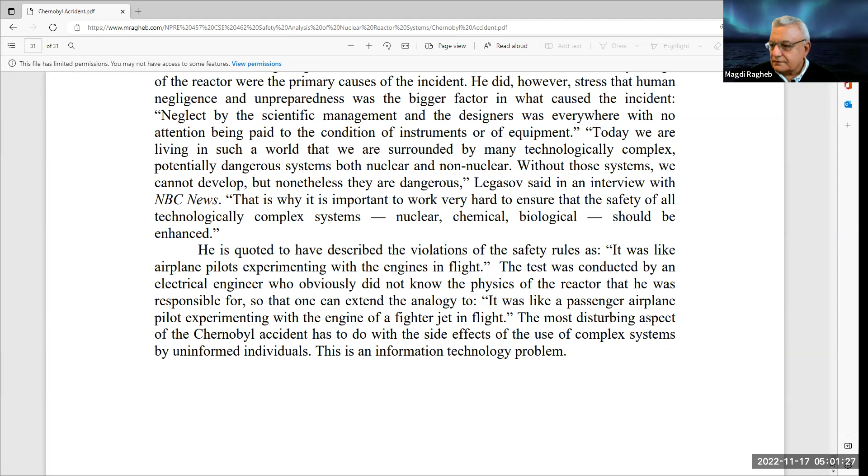In terms of the classification of the different major accidents that happened in the nuclear field in general, there is a classification that has been set up for the different levels of accidents in the history of nuclear energy generation. I included it as part of the chapter on the Chernobyl accident. Let's find it here, I think that's where we stopped.

There is an International Nuclear and Radiological Event Scale, designated as INES. It classifies the Chernobyl accident as an event at level 7. Later on, we'll study the Fukushima Daiichi accident, which is also considered a class 7 accident.

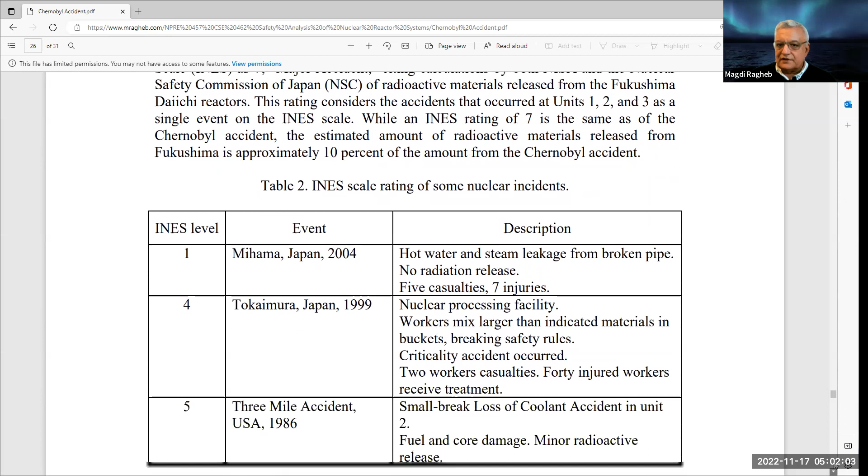But there have been other accidents before in the nuclear field that we should be aware of. In Mihama, Japan in 2004, hot water and steam was released from a steam pipe. No radiation was released, but the release of steam from a hot pipe caused casualties: 5 people died and there were 7 injuries. That is the lowest level of accident according to the INES classification.

In Tokaimura, Japan, a facility that reprocesses nuclear fuel, they take the nuclear fuel, dissolve it in nitric acid, and recycle it. They extract the plutonium and uranium, and then try to use the mixed oxide, an oxide of uranium and plutonium. So this is a nuclear processing facility.

The story goes that the workers in the plant were in a hurry to leave for the weekend, and they needed to mix materials, so they used buckets. Imagine radioactive material moved around in buckets, and they put in more buckets than indicated of liquid from the reprocessing plant that contained radioactive fuel, just being in a hurry. They broke the safety rules.

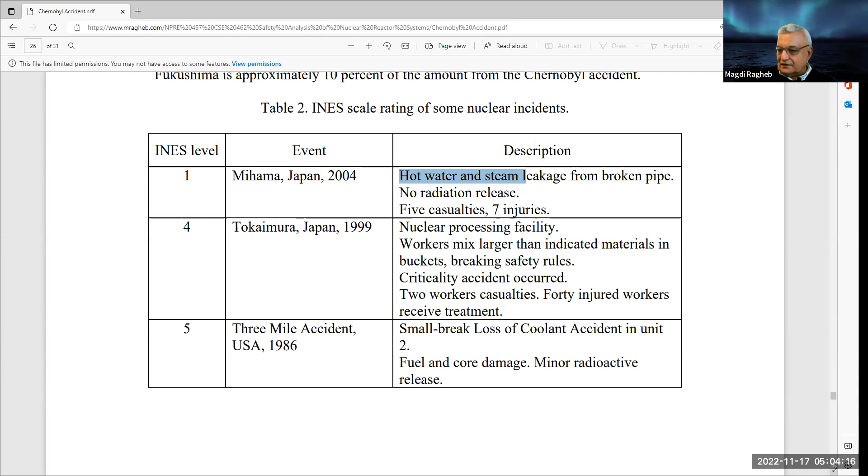Later on, we'll study 3 Mile Island in the United States. It's classified as a small break loss of coolant accident in unit number 2. There were 2 units operating at the 3 Mile Island location, and number 2 was the one that had the accident. We'll study in more detail the human errors as well as the equipment failures and design flaws, which are the main causes of these accidents.

In that case, the core of the reactor did melt and was damaged. There was a minor radioactivity release. Nobody died in the accident, fortunately. Unit 1 continued operation for a long time, but just because of aging it became too old and they discontinued its operation. 3 Mile Island was a category 5 according to the INES scale we defined earlier.

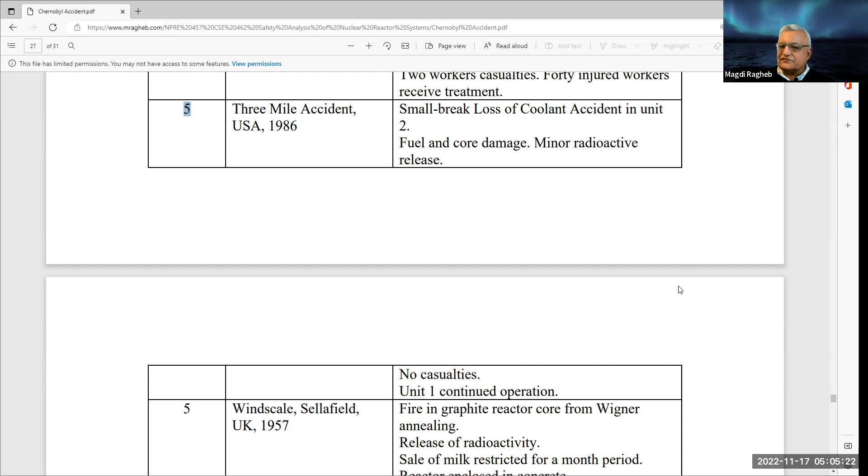Windscale in Sellafield is a new name for Windscale in 1957 in the UK. Remember, it was a dual purpose plant producing both plutonium and electricity in the UK. We got a fire in the graphite core from the process of releasing the hardness from the Wigner energy, the process of annealing. They did not conduct it carefully, and the graphite caught fire, releasing radioactivity from the fuel to the environment.

The main concern was iodine being released at the high temperature of the accident, the graphite burning. The iodine ended up depositing itself on grazing materials where cows are grazing in the fields. It finds its way to the milk, and the milk will find its way to people using cheese or drinking the milk.

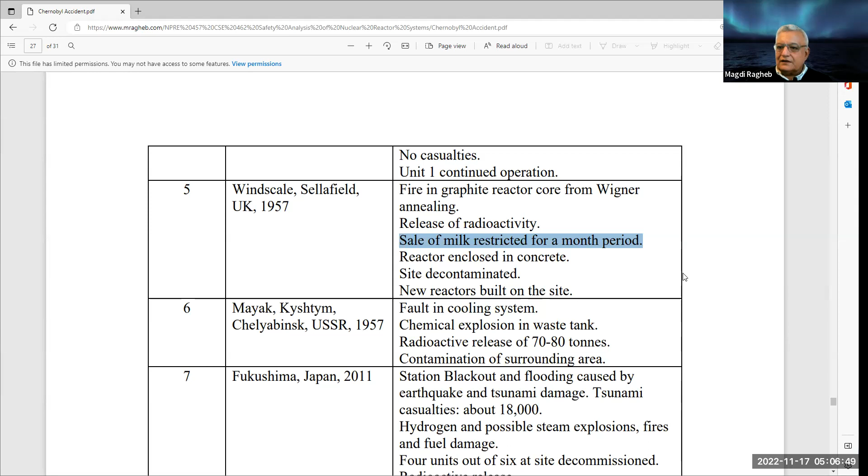So in that case, grazing was banned. They kept the cows indoors and only fed them on stored hay, alfalfa, or whatever material they were feeding them. Nobody was hurt in a significant way. The reactor ended up being enclosed in concrete, interesting enough, the same situation as happened at Chernobyl.

Chernobyl, interestingly, also had a core with graphite as a moderator. In both that case and Windscale, the graphite was almost like charcoal and caught fire. The site at Sellafield, or Windscale, was decontaminated, and new reactors were actually built on the site.

If you travel to Europe, you'll notice it's very crowded compared to the United States. Here, I would find a new site, but in the UK they reuse the same site. Windscale is classified as a category 5 accident in terms of severity on the INES scale.

There was an accident even more serious than Windscale that happened in the old USSR, the Union of Soviet Socialist Republics, in 1957. It happened at a place called Chelyabinsk, caused by a fault in the cooling system.

That was a reprocessing plant, the same as Tokai Mura in Japan. They disposed of waste into waste tanks. Some say it was in a pond outside the plant, but the Russians say it was a waste tank. A chemical explosion happened in the tank — not a nuclear explosion, simply the chemicals exploded. There was a release of 70 to 80 tons of material from the tank, which would have been in liquid phase. They decontaminated the surrounding area, and the plant basically continued operating.

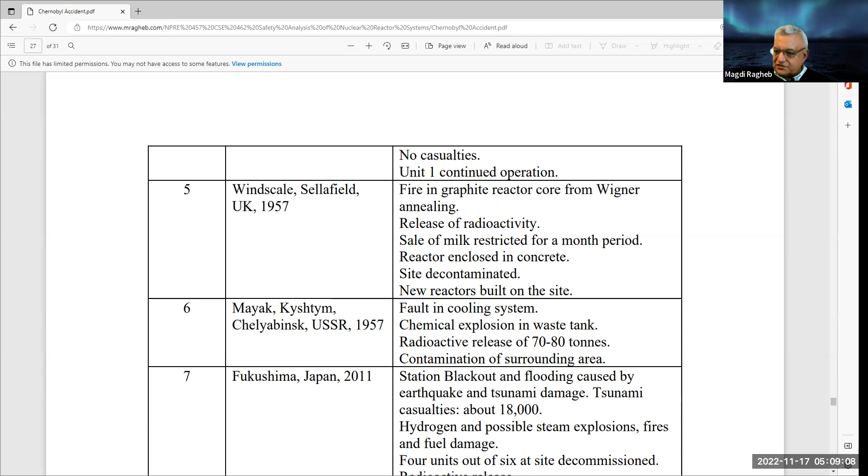Notice when we write tons here, this is the French way of writing ton, the SI or Système International unit. Remember, 1 metric ton is 1,000 kilograms. If you write only TON, it is identified as the American ton, 2,000 pounds. There is also a short ton and a long ton.

Last time we dealt with Chernobyl, which happened in 1986. The core became critical, and a fire in the graphite core ensued. There was a steam explosion that threw the lid, 800 tons in weight, up in the air and back down — that's what we analyzed in the chapter on the phenomenology of a steam explosion.

The fire at Chernobyl burned for 9 days, and basically heroic efforts were made by firefighters, knowing they were being exposed to radiation, trying to extinguish the fire.

There was also a steam explosion, caused by a design flaw in that they placed water in their pressure suppression pool right below the reactor core. I suspect a similar situation, to a lesser degree, happened in unit number 3 at Fukushima, but it's not being advertised — it needs to be studied over time.

Basically, 47 first responders, as they are called, lost their lives, unfortunately, and there were 2 casualties in the steam explosion. There has been a significant radioactive release in the area around Pripyat, the little town close to Chernobyl.

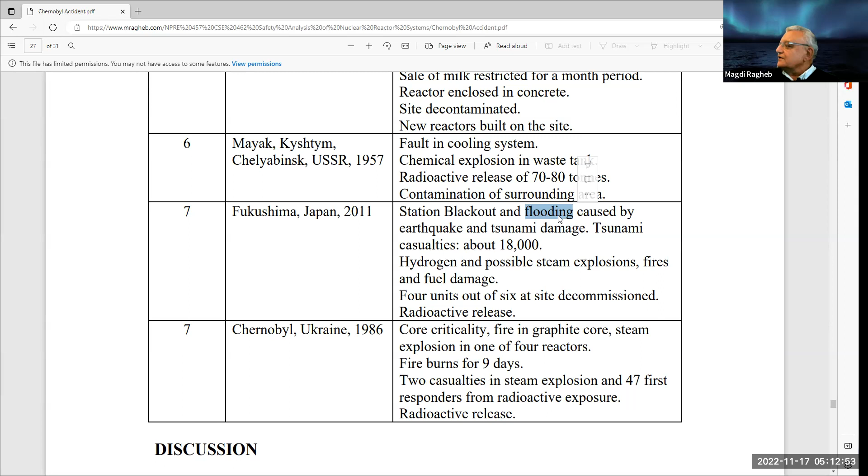So it adds to the list of causes of accidents in that case, not just human errors, equipment failures, and design flaws, but also natural disasters as possible causes. The casualty list has not been workers at the plant itself.

However, unfortunately, 18,000 people lost their lives in Japan from the tsunami itself. There have definitely been hydrogen explosions, and we know hydrogen is produced from the interaction of very high temperature steam with metals, and hydrogen, if not released from the containment structure, is highly reactive.

It led, in the case of the Fukushima accident, to hydrogen explosions. Four units out of six on the site have been decommissioned, even though two of the units were not operating at the time the accident happened. There has definitely been a radioactive release.

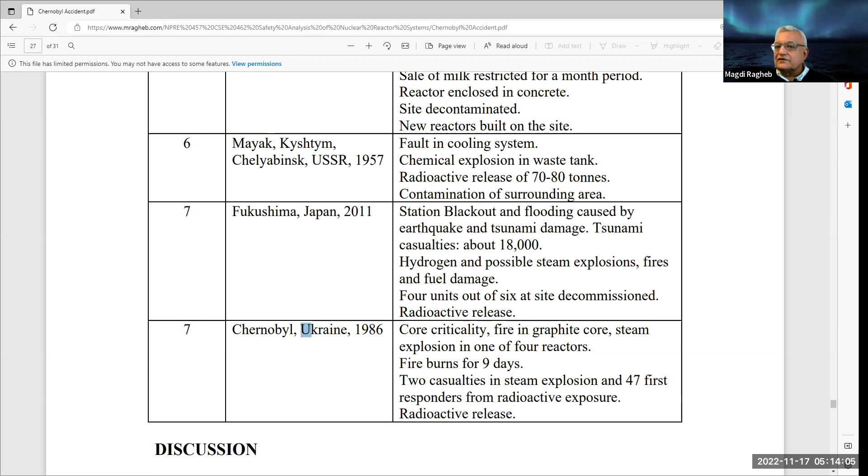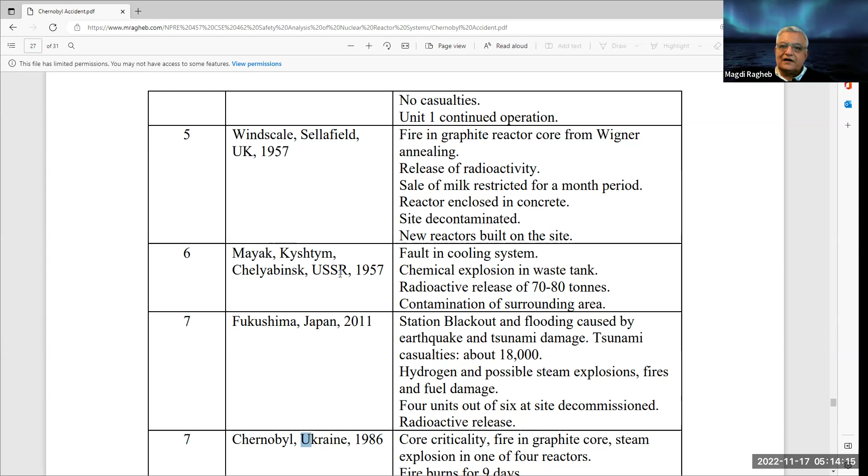So the most serious accidents are Chernobyl, which we covered last time, as well as Fukushima at the same level of seriousness, followed by the reprocessing plant at Kyshtym in the old USSR, now Chelyabinsk, in Russia. Then Windscale and

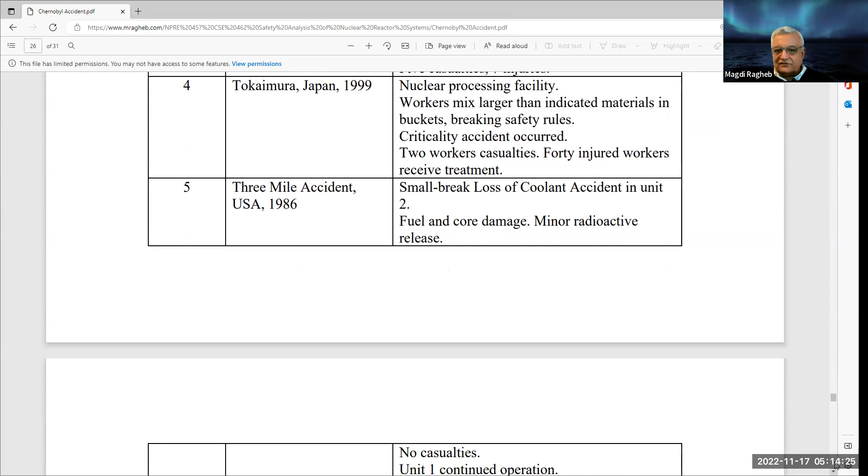the one at Tokai Mura and Three Mile Island. The interesting thing is that Three Mile Island didn't cause any casualties whatsoever, even though unit 2 in the plant had a core that totally melted. It was totally destroyed in general.

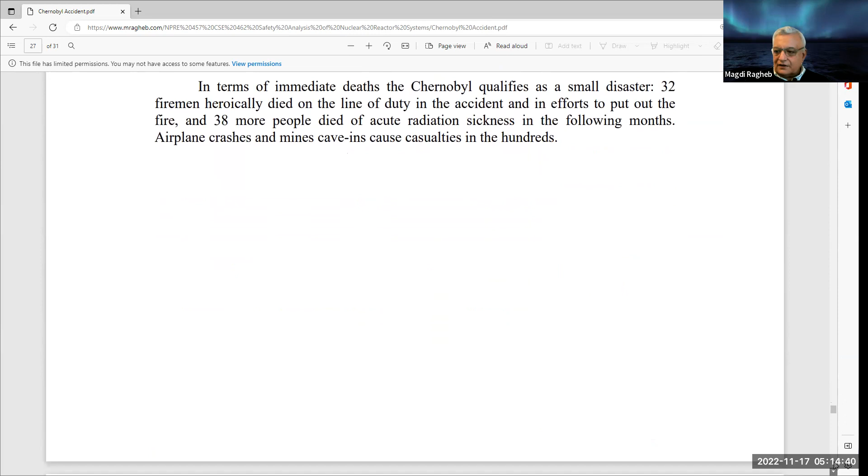This is the situation right now at the Chernobyl plant. They constructed, remember, the plant at the site of Chernobyl, north of Kiev, in the north of present-day Ukraine, and there were four units there.

The three other units continued operation to provide the country and Europe with electricity. There has been talk about shutting them down and replacing them with light water reactors.

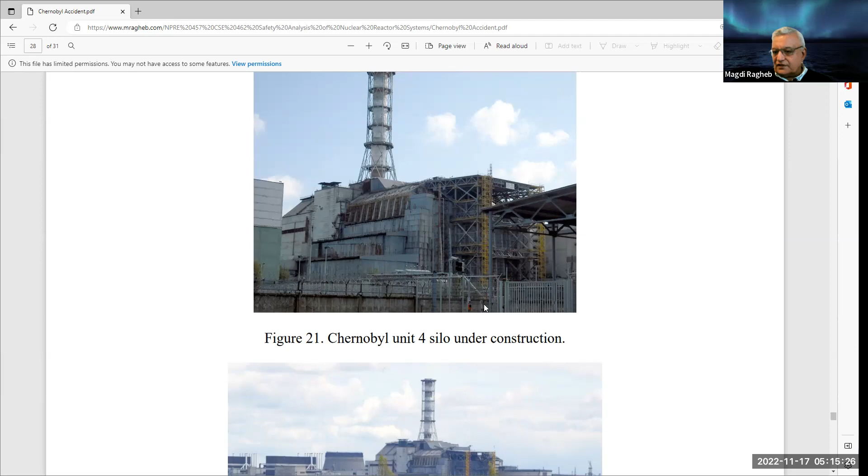They probably have been shut by now, but you could see they started building a large silo above the damaged plant. This is a chimney that aerates the plant itself. You could see here the other units, reactors 1, 2, 3, continued operation for some time.

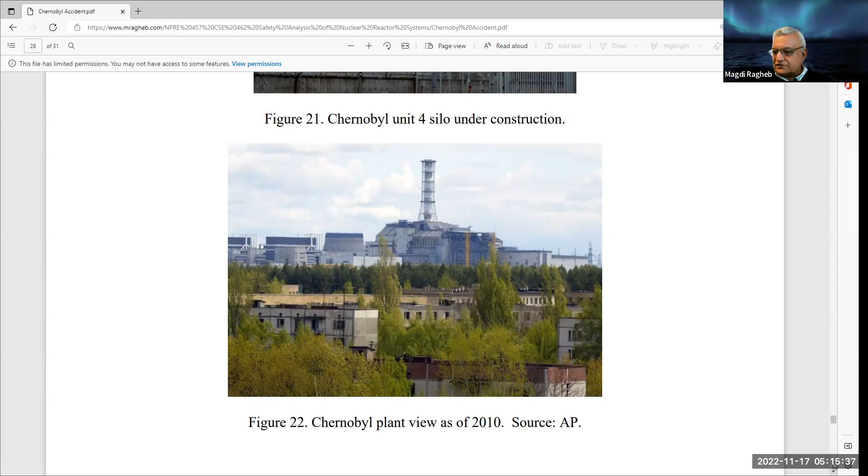And lately, the concrete silo has also been covered with a large steel containment. The idea is to allow radioactivity to decrease over time before they can go in and remove it and dispose of it underground. In addition, covering it prevents the elements, water and wind, from releasing the radioactivity to the environment.

As I suggested, this is the way it looks now. The fascinating thing is that the release of radioactivity has been primarily cesium-137 in the surrounding forests. And we said earlier, when we studied the different isotope features, that this has a 20 or 30 year half-life. So the radioactivity has been decreasing very substantially.

And they have, in fact, been allowing older people to return to their homes. Wildlife and nature are basically restoring the woods around it. They now find wildlife like wolves and other wildlife in general, including even deer. So this is the situation there.

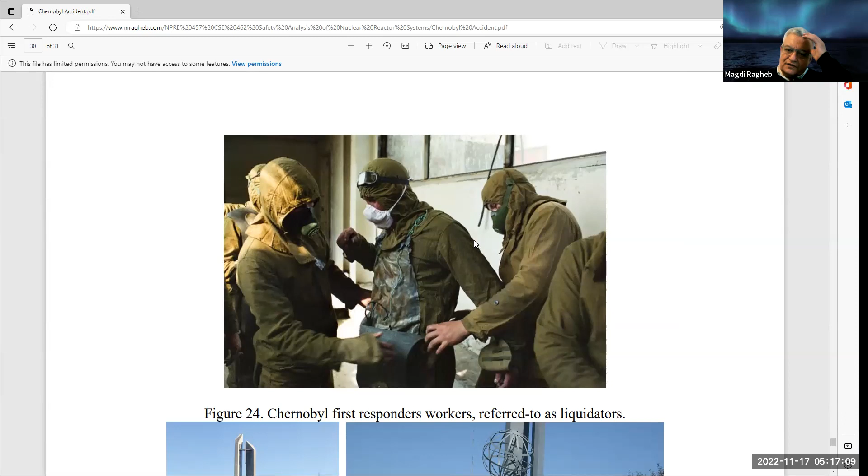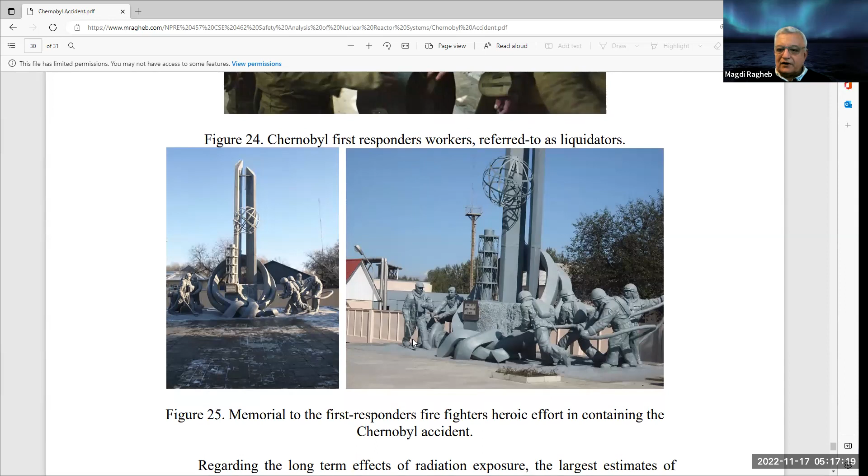The Ukrainians and Russians basically honor the people who have been called the liquidators. You could see here that they were definitely exposed to radioactivity in trying to control the accident. This is a memorial to those first responders, the firefighters who lost their lives fighting the fire in the plant itself.

From that perspective, you'll find that Chernobyl was the most serious accident in the history of nuclear power generation. A famous Russian scientist, Valery Alexeyevich Legasov, was a Soviet inorganic chemist and member of the Academy of Sciences, remembered as the chief of the commission investigating the Chernobyl accident.

In 1986, he headed to Vienna, Austria, for a conference by the International Atomic Energy Agency, located in Vienna, and they had a five-hour hearing. He stated that the main cause of the accident was definitely human error.

The operators did not really operate the plant as they should have. They should not have overridden the safety systems, as well as the faulty design of having a positive power coefficient of reactivity. It's a type of plant with a different moderator, the graphite, than the coolant, the light water, in that design.

He also stressed primarily the human negligence and unpreparedness, and that is a lesson you have to learn. Sometimes we become complacent in dealing with our own safety equipment.

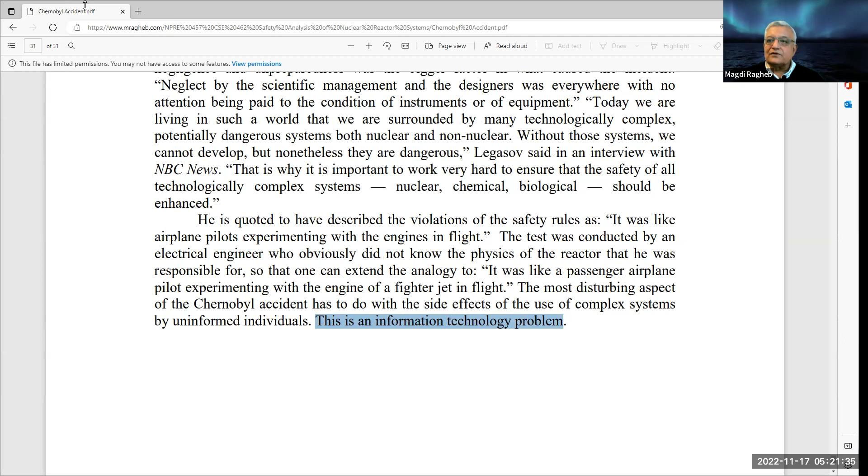The most disturbing aspect of the Chernobyl accident has to do with the side effects of the use of complex systems by uninformed individuals. This is, in fact, an information technology problem that we all have to be aware of. That is as much as I want to cover about the Chernobyl accident in a thorough way.

There was another accident that hasn't been publicized a lot, that tells you more about the design flaws that could happen in the design of a complex system. A nuclear power plant is a complex system in that case. This is exemplified by the Browns Ferry fire.

Browns Ferry is a plant here in the United States. It's a 3-unit plant, units 1, 2, and 3. This is an actual picture of the plant — 3-unit boiling water reactors. It is near Athens in Alabama, on the banks of the Tennessee River, where it gets its cooling. It was commissioned in 1966 and finished in 1974.

It became the Tennessee Valley Authority's plant. The Tennessee Valley Authority is a utility run by the government of the United States, so it's a public utility. The TVA runs coal power plants, hydroelectric power plants, and nuclear power plants to produce electricity for the Department of Energy complex in the area of Oak Ridge, Tennessee.

They also provide power to places like Alcoa at Knoxville, Tennessee, very close to the Oak Ridge laboratory site. Alcoa stands for Aluminum Company of America — it produces aluminum, and the production of aluminum needs quite a bit of electricity. In fact, our power lines in this area carry power from around us — north, south, east, west, as well as from Iowa — all the way south to Tennessee, where they also use that electricity in the production of aluminum in general.

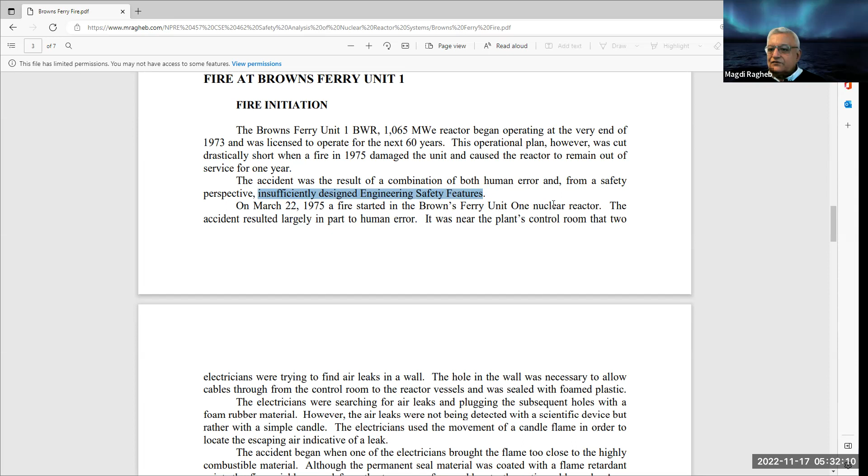On March 22nd, 1975, a fire started at unit number 1. Remember, we have 3 units there. The accident resulted largely from human error. It was near the plant's control room, and 2 electricians were trying to find air leaks in a wall. The hole in the wall was necessary to allow cables through from the control room to the reactor vessels, and the pipe was sealed with foamed plastic, styrofoam.

The electricians were searching for air leaks, and they were plugging the subsequent holes with a foam rubber material. However, the air leaks were not being detected with a scientific device, but rather with a simple candle. Imagine a very expensive power plant that has achievement awards in operation, and they go and use a candle to detect the air leaks. The electricians use the movement of a candle flame in order to locate the escaping air indicative of a leak. The accident began when one of the electricians brought the flame too close to the highly combustible material, which is the foam insulation.

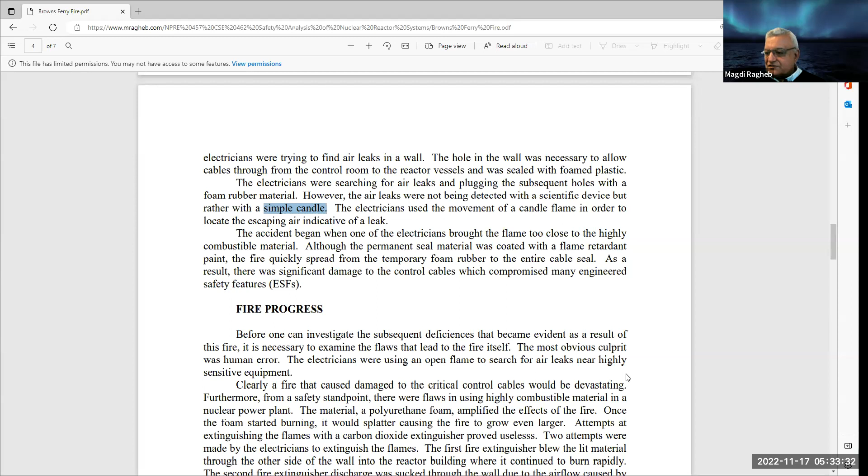Although the permanent seal material was coated with a flame retardant paint, the fire quickly spread from the temporary foam rubber to the entire cable seal. As a result, there was significant damage to the control cables, which compromised many engineered safety features. Now, that's very interesting, because now you lose control. You lose the contact between the control room and the safety equipment and the control rods and the whole operation of the reactor, and it's threatened to really become a very serious accident.

A fire that caused damage to the critical control cable would be devastating. From a safety standpoint, there were flaws in using combustible material in a nuclear power plant. You don't do that. The material, a polyurethane foam, amplified the effect of the fire. Once the foam started burning, it would splatter, causing the fire to grow even larger. So that is what happened if you set fire to styrofoam.

Attempts at extinguishing the flame with a carbon dioxide extinguisher proved useless. They brought carbon dioxide, and they started trying to cover and extinguish the fire. That's an electrical fire, they said, and you extinguish electrical fires with carbon dioxide. But then they brought in more air by blowing the carbon dioxide into the ducts, so the fire even grew larger.

2 attempts were made by the electricians to extinguish the flames. The first fire extinguisher discharge blew the lit material through the other side of the wall into the reactor building. So they made it even worse from the outside to the inside, and it started burning rapidly. The second fire extinguisher discharge was sucked through the wall due to the airflow caused by the fire, and only caused the flammable material to spread even more.

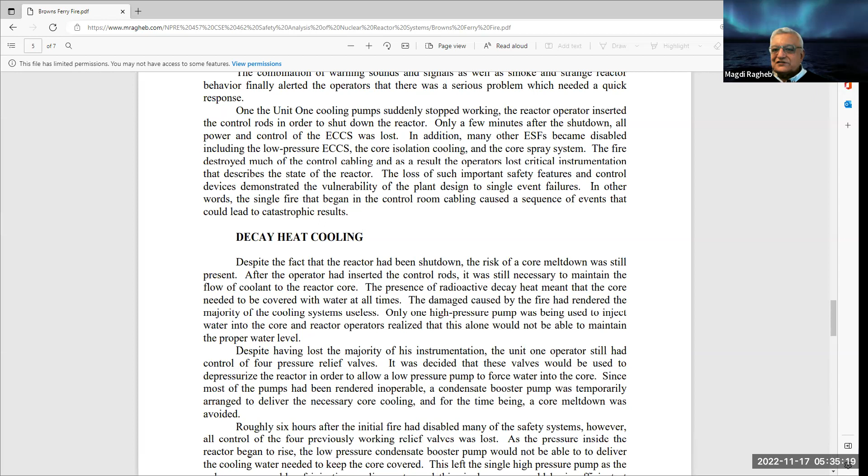So they are faced now very quickly with the same situation as the people at Windscale faced, a fire in the graphite—but that was not in that case in the graphite. It was a fire in the insulating material. And lo and behold, it's around the control systems. So they lost the connection between the control room and the reactor proper itself.

And the analogy is interesting with the Sellafield or Windscale accident, because initially they would not try to extinguish the fire with water. They tried the carbon dioxide and everything, and it didn't work. And then the fire chief at Windscale in the UK suggested that they have to cool the fire and use water. And when they used water, that is only when they were able to extinguish the fire. The same situation, interestingly enough, happened at the Browns Ferry plant.

The initiation of the fire was not the only event triggered by human error. After efforts made by the electricians to put out the fire with extinguishers had failed, one engineer attempted to activate an emergency system that would purge the room of oxygen by releasing a large amount of carbon dioxide.

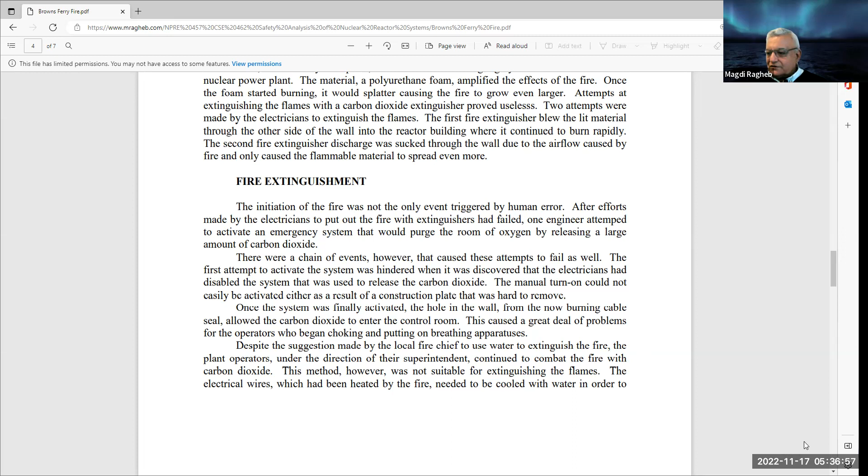There was a chain of events. The first attempt to activate the system was hindered when it was discovered that the electricians had disabled the system used to release the carbon dioxide. So they were not able to use the carbon dioxide. The manual turn-on could not easily be activated either, as a result of a construction plate that was hard to remove. So they could not really activate it initially.

Once the system was finally activated, the hole in the wall from the now-burning cable seal allowed the carbon dioxide to enter the control room. And that caused a great deal of problems for the operators, who began choking. Of course, we cannot breathe carbon dioxide. And that's why in control rooms you'll find that they have oxygen masks so that they can breathe in case there is some kind of carbon dioxide release.

In that case, the operators started choking and putting on breathing apparatuses to operate with the carbon dioxide around them. So they really sent the fire into the control room now with the carbon dioxide.

Came up the suggestion by the local fire chief, like at Windscale, or maybe he has read about Windscale: just let's use water to extinguish the fire. The plant operators, under the direction of their superintendent, when everything else failed, for a while continued to combat the fire with the carbon dioxide. It was not suitable for extinguishing the flames.

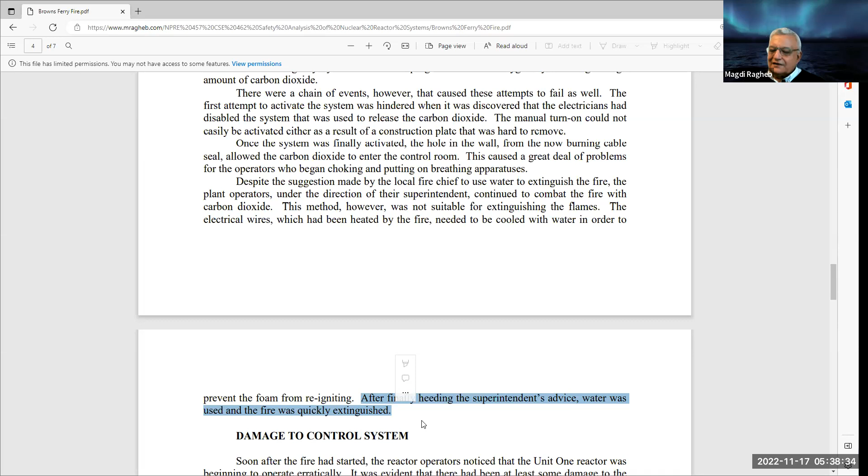The electrical wires had been heated by the fire and needed to be cooled with water in order to prevent the foam from reigniting. After finally deciding to heed the advice of basically the firefighters and using water—if they would have learned about Windscale, they would have used it all the way from the beginning—they used water and the fire was extinguished and the reactor was safely shut down.

The damage to the control system was significant, and it may have prevented the operation of the emergency core cooling system. Once smoke began to come out from the panel that controlled the engineered safety features, in the control room you find the panic system, all kinds of lights flashing at you telling you there is something wrong, and then you have also sounds of alarms, and it becomes a very alarming situation in general.

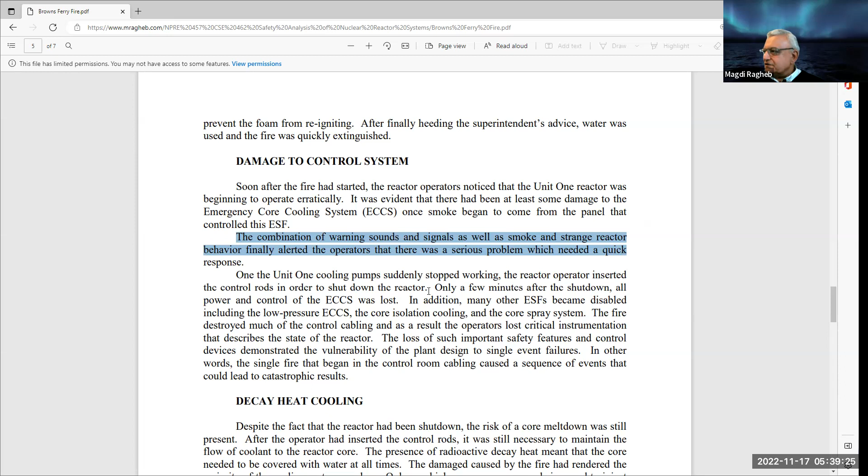On Unit 1, the cooling pump suddenly stopped working. The reactor operator inserted the control rods and shut down the fission reactor. So in that case, they were left only with the decay heat and not the 1,000 megawatt electrical power generated.

Many engineered safety features became disabled. If you don't have control on them with the wiring, you do not have control on the engineered safety features—the core isolation cooling, the core spray system that operates for boiling water reactors—also stopped operating. The loss of such important safety features and control devices demonstrated the vulnerability of the plant design to single event failures, as they're called—in that case, the fire.

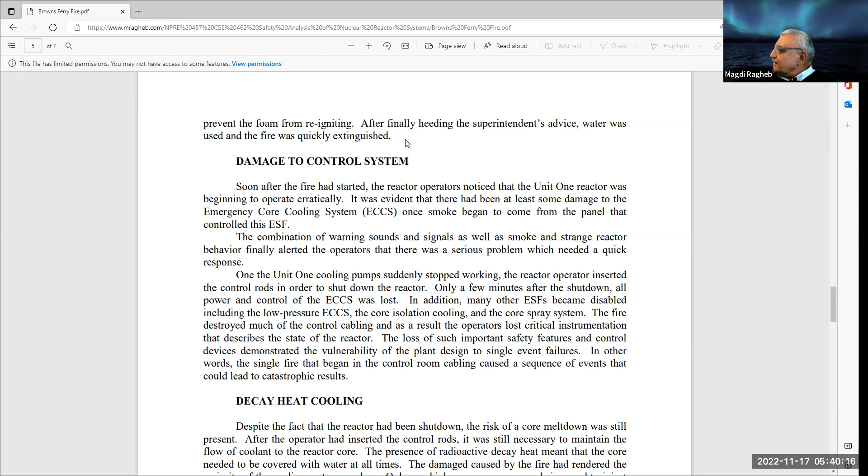Now, the fire happened—it's a single event—but because it affected many of the control systems, the wiring, it became what we called, when we studied fault tree analysis, a common mode failure. So one event of fire caused the failure of many of the other engineered safety features. In other words, a single fire that began in the control room cabling caused a sequence of events that could have led to very catastrophic results.

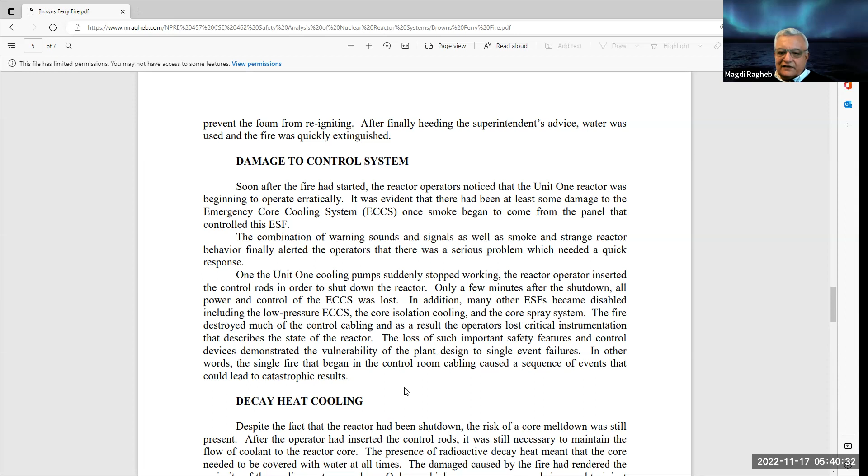We were lucky it didn't basically progress into a very serious accident. Decay heat—since they were able to insert the control rods, they shut down the main fission reaction, which they should have done immediately from the beginning.

They had to deal with the decay heat removal system, and that's why I've been advocating in many articles that the nuclear industry should switch from using solid fuels, in which you leave the fission products that generate the decay heat even after you shut down the fission reaction. The alternative is to use a liquid. So if you move from using solids as a fuel to a liquid, a molten salt as an example, you could basically remove those fission products because you are circulating the liquid continuously, and you eliminate totally the decay heat problem that has been the cause of many of the accidents in the history of nuclear power generation, be it Three Mile Island, the Browns Ferry fire that we are reading about today, the Chernobyl accident, as well as Fukushima in general.

It took 6 hours after the initial fire had disabled many of the safety systems. The pressure inside the reactor began to rise.

The low pressure condensate booster pump could not deliver cooling water to keep the core covered, so in that case you could melt the core. This left a single high pressure pump as the only source capable of injecting cooling water, and the single pump would be insufficient at keeping the core covered.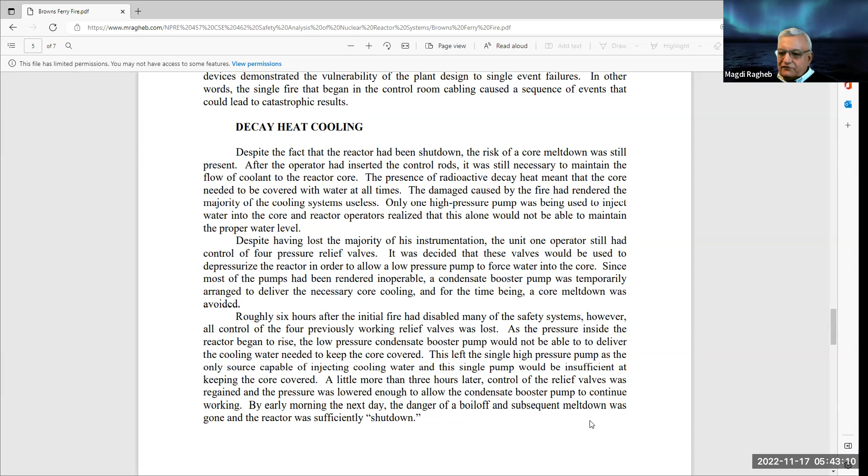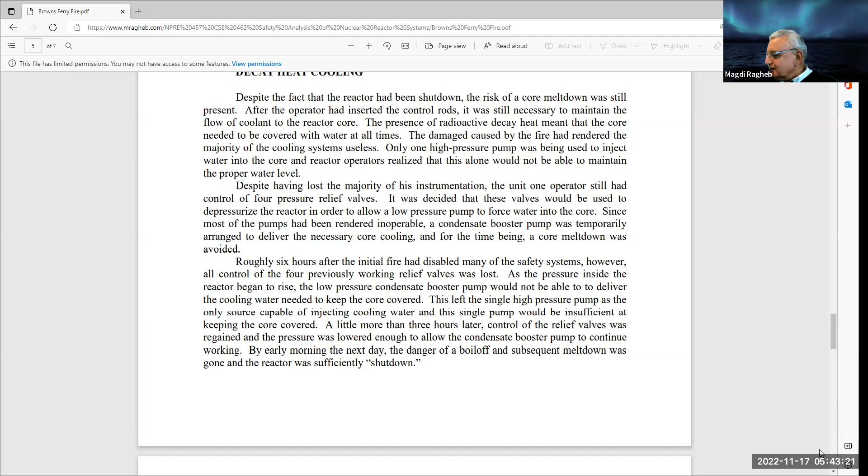Initially, the plant was pressurized, so they had to wait until they depressurized the system. Then, instead of using the high pressure pump with a low flow rate, they were able to use the low pressure pump with a high flow rate, and in that case they were able to extract the decay heat. So what started with just plugging cables in the control room ended up becoming a very serious accident that could have caused a meltdown in general.

The fire at Browns Ferry highlighted a number of significant risks, flaws, and safety issues that one must be aware of when dealing with engineering systems—not just nuclear power plants. As you notice here, the most obvious risk illustrated in these accidents is the risk of human errors. Humans are prone to making errors.

They don't go and check for air leaks with a flame that can ignite insulator material. In fact, out of town here, I know of a brand new home built by a medical doctor southwest of town, where construction workers went on the roof trying to remove the tiling, used some kind of heating element, and set the whole house on fire. So this is neglect and human error to the same level.

Adding to the list of human errors, the plant operators battled the fire with carbon dioxide for hours before finally taking the advice of the fire chief to extinguish the flames with water. Nevertheless, it was quick thinking by the reactor operators and their understanding of how the plant operates that triumphed over many of the engineered safety features which had been compromised by the fire.